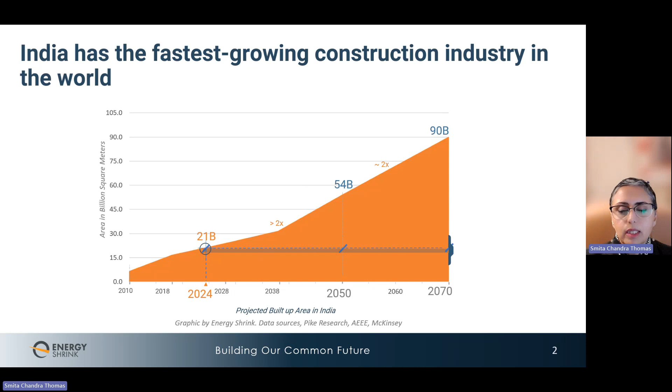I will take a couple of minutes to explain where I'm coming from. As mentioned in the introduction, my name is Smita Chandra Thomas. You know how some people are recovering alcoholics? I am a recovering architect. In fact, Anveshan is being held in the city where I went to college. I did my architecture from the College of Engineering, Trivandrum, and Trivandrum is also the home of my in-laws. That's where the Thomas in my name comes from. And I still visit Trivandrum with my family.

I really wish I could have joined you all in person. I hope you're enjoying some good weather there at this time of the year. So much cooler than northern India at this time of the year.

But Kerala gets really hot in December. You know, Kerala was not so hot and humid in the 1980s when we went to college. And the dry heat of Delhi was not so hot and so dry when I went to high school there for 2 years. And then in Himachal, where I grew up until my teenage years, we never needed more than a fan in the summer in my hometown of Sundarnagar, which is on the way to Kullu Manali in Mandi district.

There was only one way to get to our town in the 70s and 80s. We had to drive on a single lane road for 5 hours through the hills. There was the beautiful smell of pine trees as we entered the hills. And now we have a 4 lane highway lined with construction all the way from Chandigarh to Kullu Manali. No pine trees. You can cover the entire distance all the way to Kullu in about 4 hours. My hometown of Sundarnagar has become unbearable in the summer without an air conditioner.

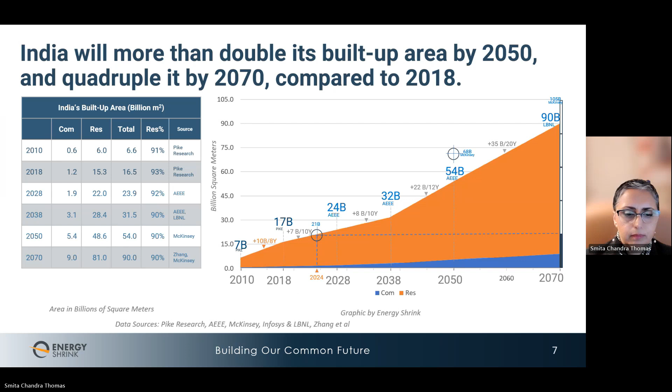Why are all these studies projecting this enormous growth? There is a trifecta of forces driving India's construction growth. One, a growing economy. Two, a growing population. And three, increasing percentages of that growing population migrating from rural to urban areas, attracted by the economic opportunities. Let's look briefly at each.

What is happening with India's economy? To look forward effectively, we must look back. Look at the economic trajectory India is on. The World Bank data on India's GDP going back to 1960 shows that India's economy grew about 10 times in the 34 years between 1960 and 1994, and another 10 times in the 28 years between 1994 and 2022. That is, it has been growing roughly 10 times every 30 years or 3 decades.

Since the early 1980s, India's annual GDP growth rate, that is your gross domestic product growth rate, has hovered between 4 to 8% for the most part. Based on these historic averages, India's economy is set to double every 10 to 12 years, which translates to roughly another 10 times growth again in the next 30 years. So if the GDP was 3 trillion US dollars in 2020, we can expect a GDP of about 30 trillion US dollars around 2050, 30 years. This increasing wealth is creating a rapidly growing middle class.

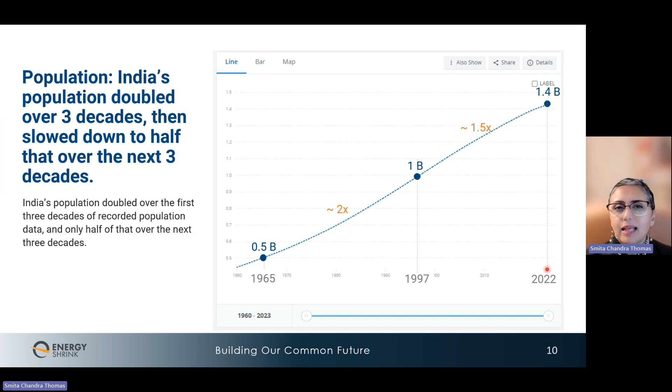Finally, let's look at urban population. Again, World Bank data shows that 80 million people lived in cities in India in 1960. In 1970, just 10 years later, when the first national building codes were published, and please note that I'm highlighting some of these years because they're related to construction. So in 1970, India's urban population was 110 million. From 80, we went to 110.

By 1994, it was 250 million people, about a quarter of the total population living in cities. In 2007, when the first national building energy codes were published, the urban population was now more than 350 million. That happens to be the total population of the US. In fact, it's more than the total population of the US. And more recently, in 2022, it was more than 500 million.

In the table, you can see the percentages, and they show the steady trend of population moving towards cities. So here's the urban population, here's the total population, and here's the percentage. Again, data is king. In 2022, nearly 1/3 of the population of India was living in cities. By 2050, more than half the population in India is expected to be urban. What was 80 million in 1960 is going to be more than 10 times at 814 million by 2050, over just 90 years. So the largest opportunity is in the housing sector in the cities in India.

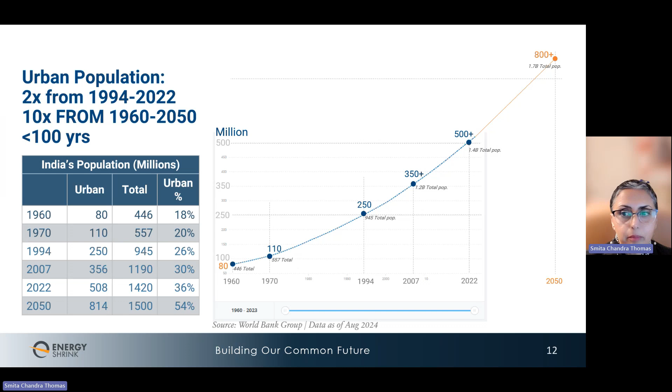Now, the global population is projected to be 9.8 billion. Let's say 10 billion in 2050. Okay, out of which India's population may be around 1.5 billion. The UN estimates that India's population will likely peak at 1.7 billion in the 2060s, but it could also peak at 1.5 billion by the 2040s in a different scenario. Either way, India will be the most populous country in the world by far in 2050 and through 2070.

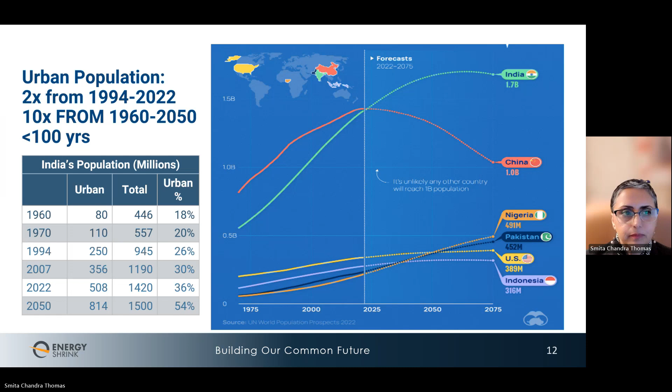One in every six people in the world will live in India by 2050. That is our 1.5 billion people. And of these 1.5 billion people, more than 50% will live in an Indian city. That's our 814 million. That means a twelfth of the world's population will live in a city in India. About one in every six people in the world will be an Indian, and half of those, one in every 12 in the world, will be living in an Indian city in 2050.

Keep in mind that these numbers are all projections based on what we know from history. Very smart people spend their entire lives analyzing these trends. But all these numbers might go out the window if there's a new pandemic, or a world war could change the economic and population trajectory. Political or social instability can easily tank the economy, changing the construction trend, or all of human civilization might fall to artificial intelligence. As they say, the only thing certain about the future is uncertainty. But still, we must study these likely scenarios and prepare to control what we can.

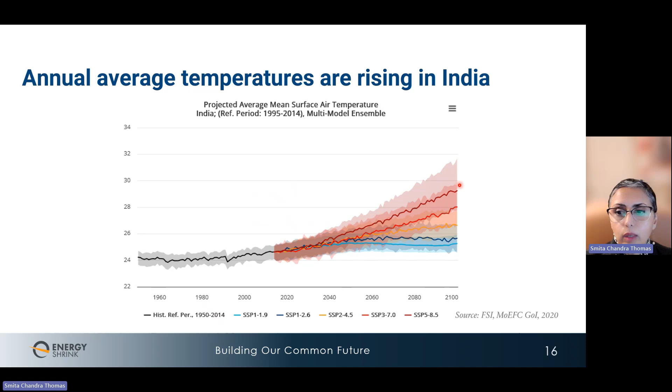So, coming to the second part of my presentation, if things stay more or less on the current track, what can we expect as climate impacts? Annual average temperatures are rising in India. I'm sure you can all feel it. The chart shows projections of temperature changes in India between 1960 and 2100 in a few different scenarios. In the best case scenario, the average annual temperatures will increase by about 1 degree Celsius in 2040. In the worst case scenario, average temperatures are projected to go up by 6 degrees Celsius. Given the uncertainty, I would say let's get prepared for the worst and let's see what we can do to help keep those lines down.

Only 5% of the households in India currently have an AC. By about 2040, about half the households might have one. As the economy improves, the temperatures rise, and we build more urban areas, making it even hotter, we will see more ACs.

Now, the heat rejected from these ACs will in turn make the outside air even hotter. You know how air conditioners work. They cool the inside air and they reject heat outside. So your outside air will get even hotter, which will then require you to use your AC even more. So it's a vicious cycle.

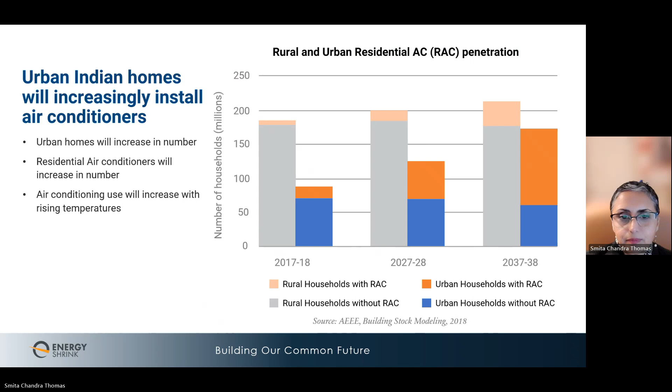Because of this combination of hot weather, population, and economy, energy consumption in buildings in India is expected to increase faster than in any other global regions. After a small setback during the pandemic, the rate has picked up again. India ranks amongst the leading electricity producing countries worldwide, just below China and the United States.

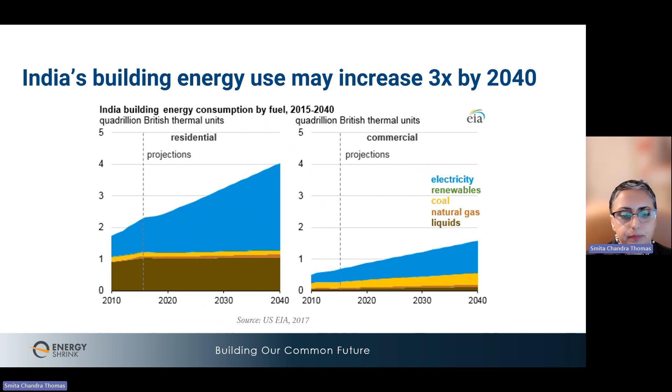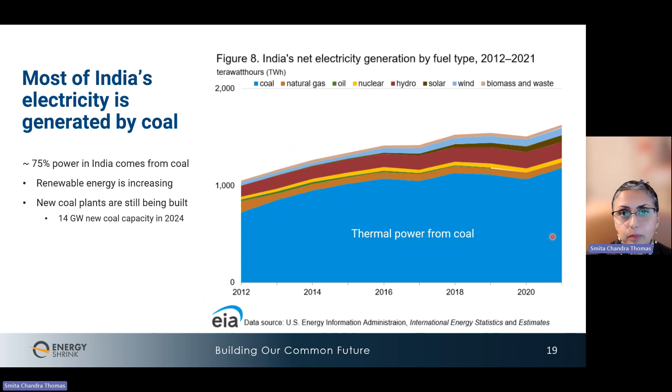Look at this important statistic. In 2021, building emissions accounted for around a fifth of India's total carbon emissions and 33%, a third of the total energy use, went to buildings. So the carbon intensity of India's electricity grid is currently about 0.7 kg of carbon dioxide per kilowatt hour. That is nearly twice that of other G20 countries because of our fuel mix. That means every 3 kilowatt hours of electricity used in India produces about 2 kilograms of carbon emissions.

An average air conditioner, let's say you have a 1500-watt air conditioner, it will use about 1.5 kilowatt hours in 1 hour and about 500 kilowatt hours in 1 month. So in 3 months of summer, it would use about 1500 kilowatt hours. 1500 kilowatt hours used for one AC in one summer will produce about 1000 kilograms of carbon emissions. That's 1 ton of carbon dioxide from one AC in one season.

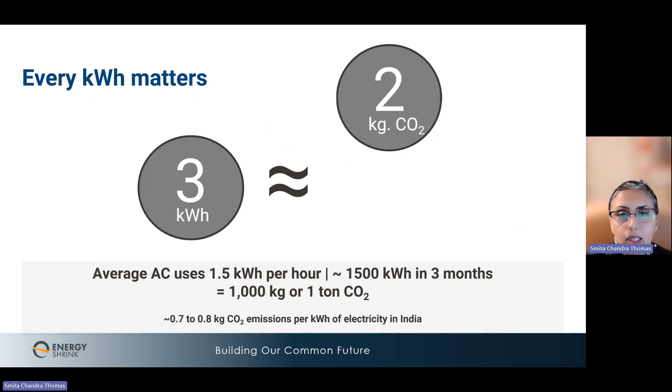And you know, once carbon is produced, it goes into the air and it stays there for hundreds of years. Carbon dioxide has a life of hundreds of years. So one AC is producing 1 ton of carbon. Now multiply that by 100 million air conditioners in urban India and imagine what that will do.

But you know what? The high use of carbon-heavy electricity is only part of the problem. The refrigerants used in ACs are also a huge source of global warming and climate change.

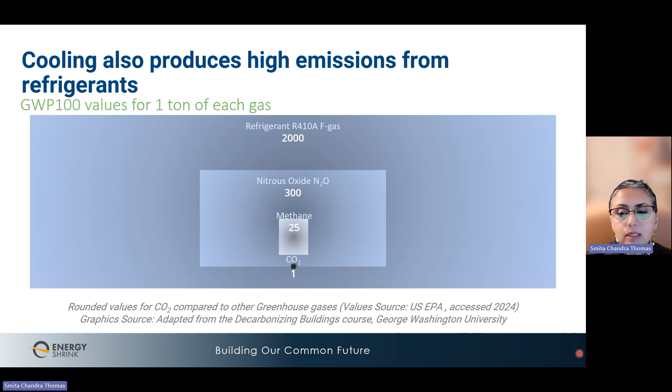When this refrigerant gas eventually leaks, or if it is not disposed of properly, it escapes into the atmosphere, causing 2,000 units of global warming. Now imagine the impact of that for 100 million air conditioners. This is actually what I've done in this figure, calculated that impact. These are some calculations I did back in 2017 for a paper I was writing on coolants for my clients at the World Bank.

The orange parts here are direct emissions from refrigerants. The blue parts are the indirect emissions from the electricity used for air conditioning, because the emissions are not at the building, they're at the power plant, so they're called indirect. As you can see, in a business as usual scenario, which we call BAU, the total emissions from air conditioning for India alone by 2030 could be almost as much as the rest of the global emissions we had from air conditioners in 2010.

These AC emission numbers are approaching 5% of the current total global emissions. By 2050, the emissions from air conditioning in India could be more than double the global emissions that we had from AC in 2010. That's about 5% of the total global emissions. You see, in 2013, we had very few air conditioners. And in 2050, if we keep doing what we're doing today, this is how much the impact would be.

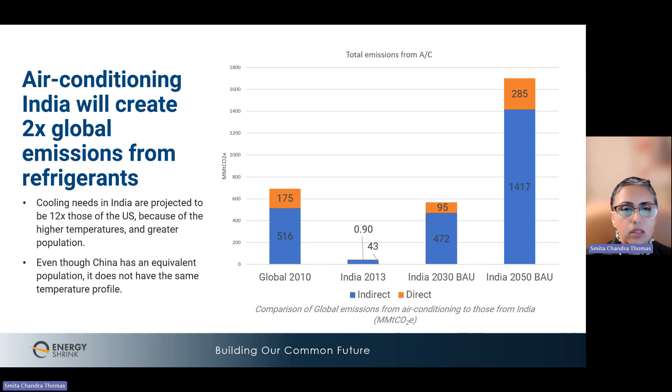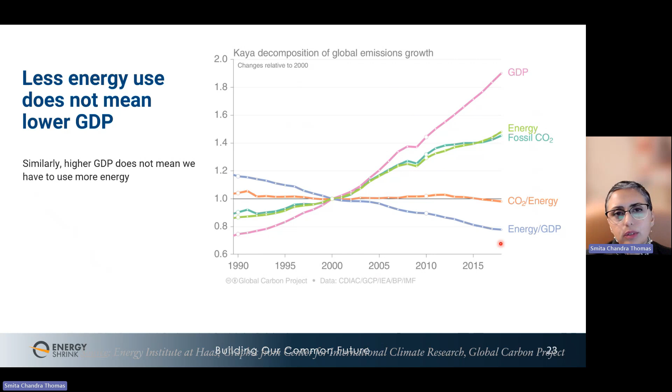India is rapidly getting richer, but an increase in GDP does not have to mean an increase in air conditioning and energy use. High energy use is not a badge of honor. In fact, as we can see in this figure, most advanced economies have decoupled their energy use and their GDP. This is showing data from advanced countries. Their GDP is on the rise, but their energy use per unit of GDP is getting lower and lower from 1990 to 2015. The lowest line here is the energy use per unit of GDP. Using resources more efficiently is in any country's national interest.

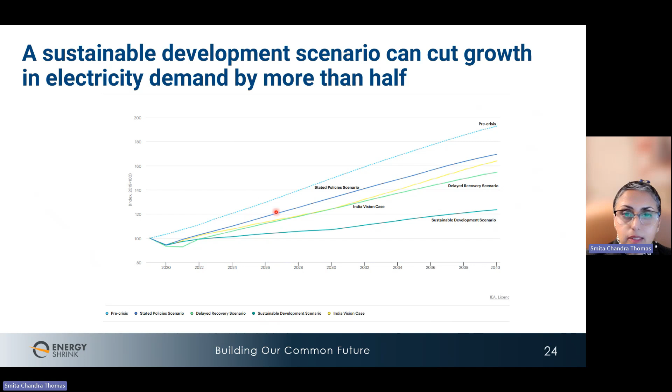In a country like India that is growing so rapidly, the impact of construction and climate is also a key consideration. So we talked about the use of energy in buildings, we talked about the use of refrigerants in buildings, but also there is the emissions from construction.

Right up front in a building life cycle, there are large amounts of emissions associated with building materials. Cement, steel, aluminum, and glass are the largest contributors to emissions from building materials globally. This is true globally. So a responsible architect can make a huge impact in this area by thinking about alternate materials and alternate ways to save materials.

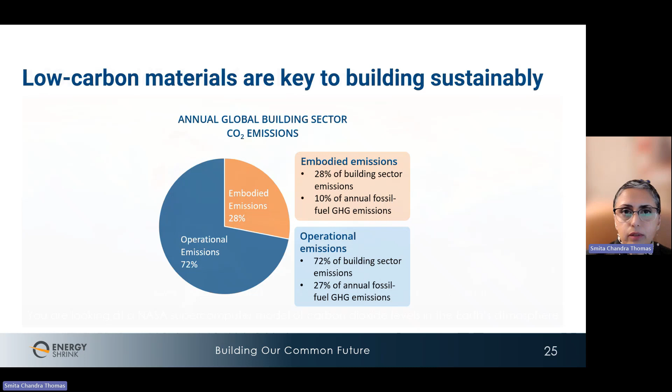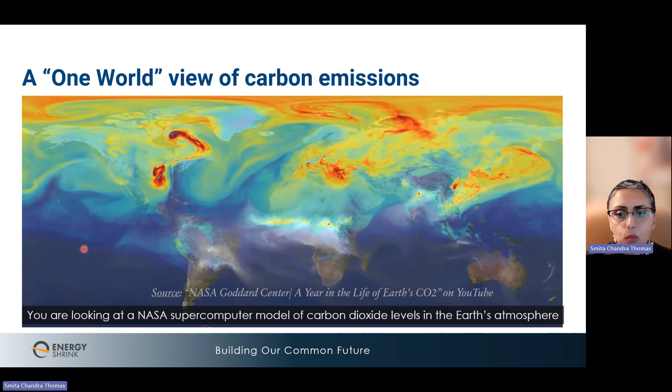So, coming to part 3 of the presentation, how can architects harness this large opportunity? By designing in such a way that provides financial stability, environmental stability, and good health and thermal comfort for their clients. I will briefly share 10 guideposts here.

Number 1, own your impact. First of all, architects must understand and own the tremendous amount of impact they can have. As the famous environmentalist Jane Goodall has said, what you do makes a difference. And you have to decide what type of difference you want to make.

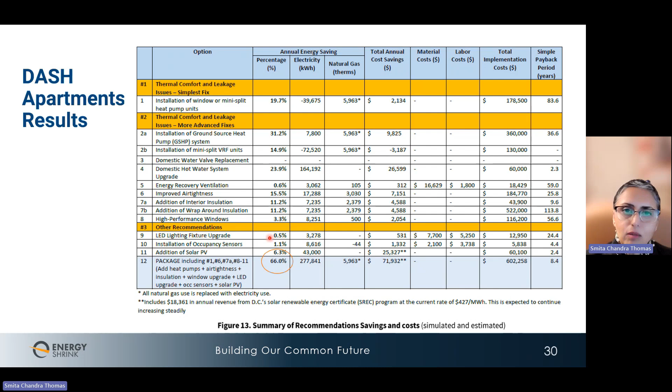And when we combined heat pumps instead of conventional air conditioners with the envelope and other measures, we got a total of 66% savings. That is, we could bring down the energy use by 2/3.

It's an old building. Additional insulation did not yield any savings. So this is also why energy modeling is important. It tells you when something is not effective and you shouldn't waste your money on it. So roof insulation yielded about 5% savings. It's a low building. If you have a very tall building, roof insulation is not going to make much difference because a very small area is covered by it. So combining all these again got us to 30% savings.

Adding window film only got about 3% improvement, but upgrading the old metal windows, which also upgrades the frame, got us 17% improvement. So when combined, the air tightness, roof and wall insulation, and window upgrades got us 46% in savings. We are cutting our energy use by almost half.

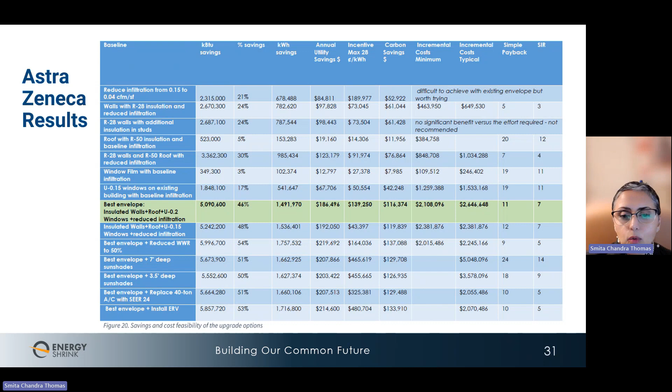This is also what I love about energy modeling. Even if you've been doing it for 20 years, a model can sometimes beat your intuition. So you'll see two depths of shades drawn here. This is a solar path diagram, and it indicated an ideal depth of 7-foot shades. But when we looked at the price of those shades, we found that 3.5-foot shades, that's about 1 meter deep shades, were much more economical. So we modeled those. We looked at the comparison and we found that it only made a difference of 1%. So that's what we recommended.

So, by the way, I do want to give a shout out to my partner in crime here, Maz Dikshit of Seed Consulting. She's based in Gujarat, and I work very closely with her on these modeling projects that I've shared.

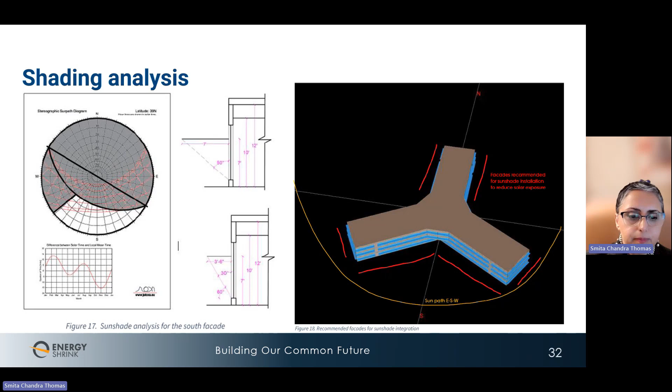Okay, so the next, number 2, get started. What do I mean by that? We don't need the perfect team or the perfect solution. Like we saw earlier, every kilowatt hour saved makes a difference to our planet. So if you can start with just one thing that you can improve in a project, do that. Make it standard practice in your projects. You can keep exploring and adding more ideas in the next project. I want to stress that we shouldn't lose any opportunity that we have, because once built, the performance of our buildings gets locked in for the life of the building for the next 50 to 100 years. So we must act whenever we get a chance to make things better.

All right. So the US happens to be the most advanced market for energy efficiency initiatives. Now, before 1973, energy consumption was booming in the US. Nobody cared because electricity was cheap. But the oil crisis in the 70s changed attitudes. People wanted to be energy independent from oil nations. It took another 20 years to create green building rating systems. And now, finally, another 30 years later, we are looking at mass scale efficiency. Before that, it was just individual green buildings here and there. So it takes time to get there. The US took 50 years, but we are in a climate crisis. So hopefully, with access to all the knowledge in the world, India can leapfrog many of these stages and get right to it.

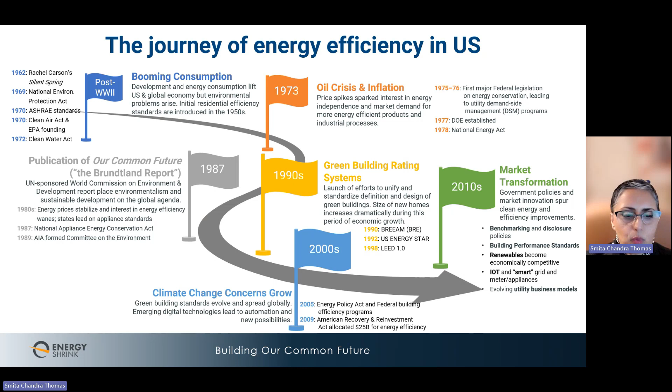I know that India is still working on implementing building codes, building energy codes. But I'd like you to keep in mind that building energy codes set the minimum acceptable standard of performance. Meeting code is like getting a passing mark. It's like getting a D. Indians like to get A's. Don't settle for a D. Get to learn your energy codes and then do much, much better than the minimum. Get an A.

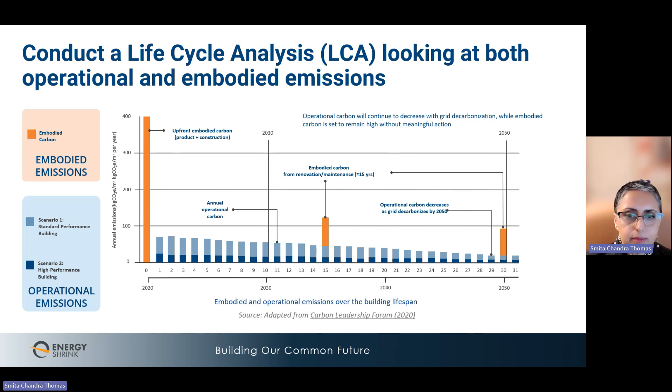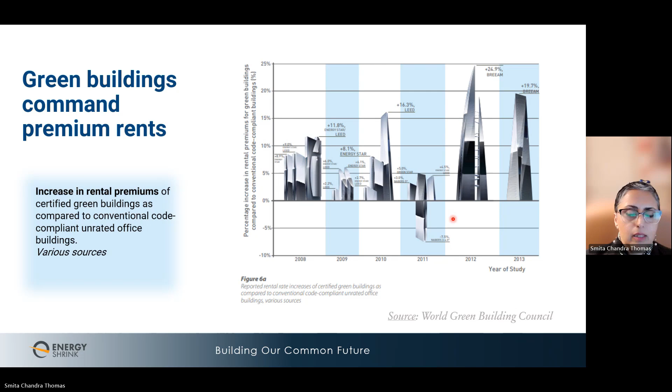All right, number 3, know the value of sustainability. Sustainability is not just a nice to have feature for greenies. It has real financial impacts for owners, especially if we can save energy in a country like India, where energy is quite expensive. So one example of financial impact is that green buildings command premium rents. Green buildings also sell faster than average.

All right, next, number 4, consider the climate. Now, this is at the heart of everything that an architect can do. Consider the climate. From a building physics perspective, the fundamentals of how a building behaves don't change from one building site to another. When we model these in any software program, the same principles of physics apply in any simulation software. Some applications may be better at calculating heat transfer by the minute, and other software may be better for natural ventilation, but essentially the same fundamental principles of physics are being modeled. The heat transfer, natural ventilation, etc.

So in modeling, we use the term GIGO, garbage in, garbage out. So yeah, you can have bad models, which are totally useless if they're not done well. But for a reasonably good model, a typical process looks like this. An architect provides building design information, and then this is combined with climate data in a simulation calculator, churned through the simulation engine using a bunch of physics equations to produce outputs. The outputs may be energy or water use, daylighting patterns, ventilation patterns.

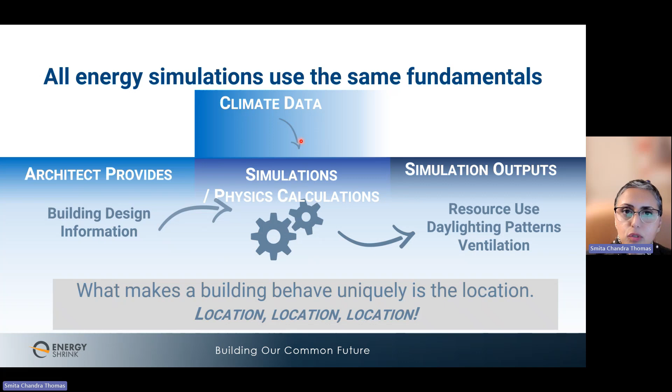So get to know your climate zones, learn their temperature, rainfall patterns, wind directions, angles of the sun in winter and summer. Take the time to understand what design elements work best in those climates. And I can guarantee you one thing, in no climate zone in India do glass towers make sense. In fact, glass towers don't make sense in most climate zones in the world. Maybe in Hawaii, if you have all the windows open. But that is because glass buildings act like greenhouses, and we are not plants. So that's the last thing we need in a hot climate.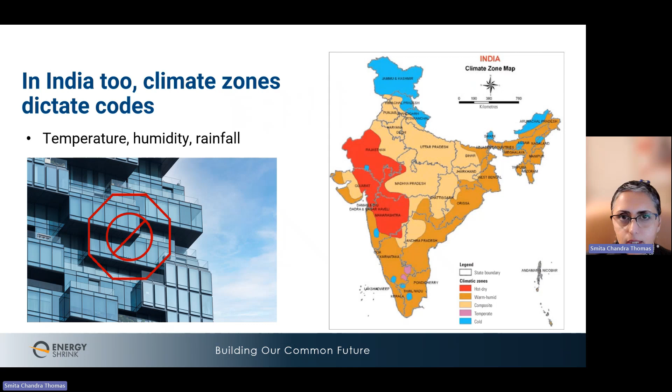I invite you to search up my article in a magazine called Triple Pundit. It's online. The article is called Shattering Glass Myths, to understand why I'm saying this better. I've written more than one article on this topic, and it's one of my pet peeves. So before I start getting upset, I'll move on to the next point. But please do look it up. Shattering Glass Myths.

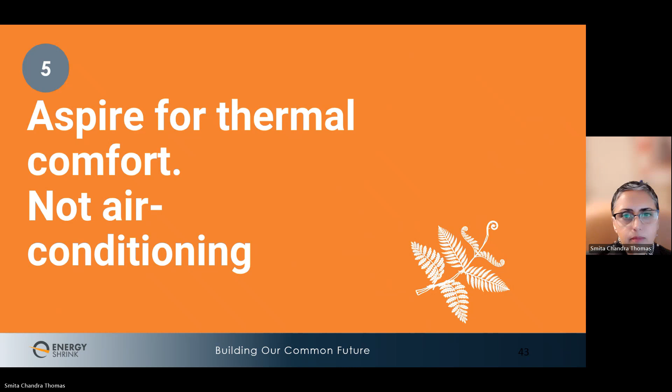All right, number 5. Aspire for thermal comfort, not air conditioning. We talked about air conditioning and energy. It's worth noting that our goal is to achieve thermal comfort. Thermal comfort is achieved simply by being mindful of the natural elements and sheltering ourselves from the extremes. Most of our energy use for cooling and heating goes into maintaining the temperature and humidity of that ball of air that we are living in.

This is why airtight envelopes make sense in a very hot and dry or a very cold climate. They don't make sense in Kerala, where natural ventilation is the key to comfort for many months in the year.

But if it's too hot, another way to keep comfortable in Kerala is to seal your house really well and then use a dehumidifier to reduce the humidity with controlled mechanical ventilation for fresh air. You do need fresh air if you seal a building very well. So anytime we introduce a mechanical system like an air conditioner, we designers want to detail our seals and our air tightness as best as possible.

Did you know that air can pass through cement, brick, and gypsum board? If you want to make a building airtight, you have to use special layers on the wall and roof and floor materials with something called low permeability. It's measured in perms, how much it allows the air to pass through. So these are typically special paints and membranes like paper and plastic barriers called air barriers.

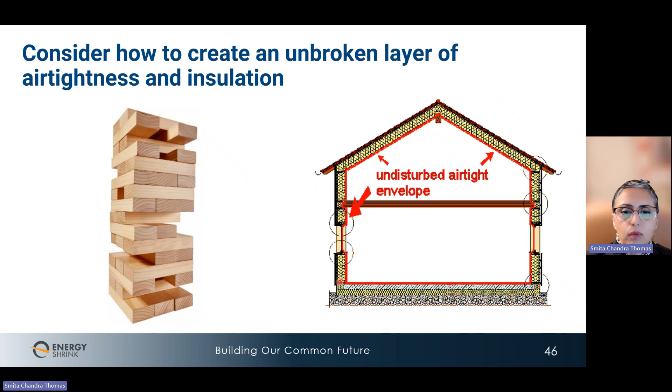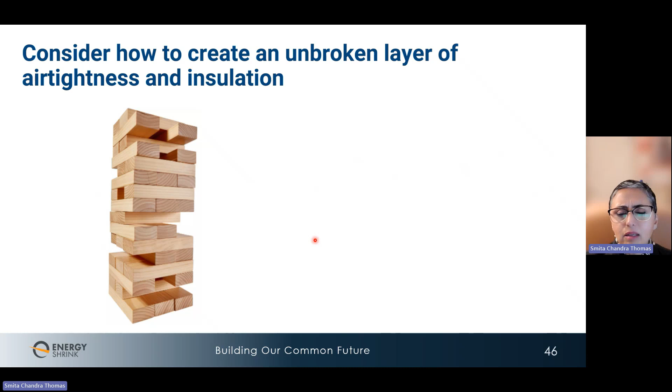Designing iconic Jenga block shapes might make us into famous architects, but they can be really uncomfortable for people living inside these spaces. And they can be hard to insulate and make sure that they're waterproof. So let me just say again, no, don't do this.

All right, number 7, focus on the fundamentals. Reviewing the fundamental natural climate elements in the early design stage is the key to good design. The key climate elements are the sun, wind, and humidity. They impact temperature, daylighting, ventilation, infiltration, humidity, and moisture damage in the building.

Some strategies that we can use to manage these impacts include building orientation, window wall ratio, thermal mass, insulation, thermal bridging, rain screens. So many things an architect can do. And an architect must look at these elements. A mechanical electrical engineer is not even going to consider them.

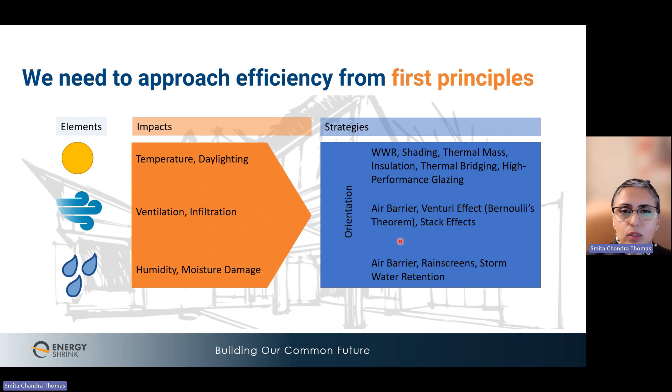All right, number 8, build it to last. To reduce emissions from materials in the future, we must build good quality buildings that can hold up to harsh elements like floods and strong winds so that we don't have to keep rebuilding. This ability of a building to withstand stress, whether it is chronic stress like regular heavy rains or sudden shocks like a flood, is called its resilience.

Okay, number 9. Truly sustainable buildings are those that will sustain themselves over the years, and that will also help sustain human life during their lifetime. To achieve such measurable energy, carbon, and resilience goals, architects must engage with the broader team and follow what we call an integrated design process.

Big slide here. I'll keep it quick. The process of integrated design is a disruptive approach to design. In the traditional approach, which is on the first half of the slide, energy is not considered in the early design stage, which is in the orange color. Energy modeling is done by mechanical electrical engineers in the DD and CD phase, the design development, construction documents stage. And at the bid stage, many times efficiency options get value engineered out of the project.

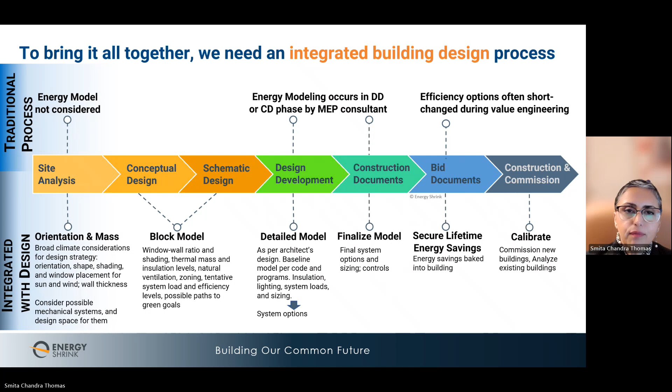But this is not the traditional business model. The fees of an architect typically don't include budget for energy modeling. So how can we get there? We need a new business model. We need to educate our client about the value of doing this upfront to save them money later. But bottom line is we have to engage early in the design process in these decisions, and so the combined hard and soft costs of a project can be kept under control. In fact, if you do it right, you can even save the client money at the end of the project.

And finally, the last point, learn from history. Isn't this the point of Anveshan, this conference? To learn from history to inform the future. We can actually save our clients money by looking at how we did things before we decided to build glass box buildings in Bangalore and then throw a whole bunch of energy and air conditioning at them to solve the problem. Machiavelli famously said that whoever wishes to foresee the future must consult the past. So one final historical fact I would like you to consider is that central air conditioning is less than 100 years old. Meanwhile, passive design principles have been around for centuries. People in Rajasthan, Assam, Himachal, Kerala all had unique building styles to suit their climates.

Well, we cannot go back to those times. We no longer have those materials, that labor, those skills anymore. But we can learn the underlying fundamental ideas. For example, high ceilings with openings and lightweight walls are good in Kerala climate. Laurie Baker had the right idea about this. But thick insulated walls are good in Himachal and Delhi. So if we can consider these elements, our client could save money on installing many extra tons of air conditioning and then also on those steep monthly bills, which will keep getting higher every year with global warming because you'll have to use your AC more.

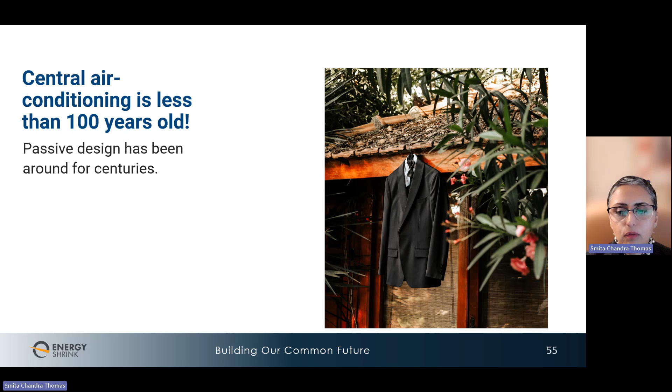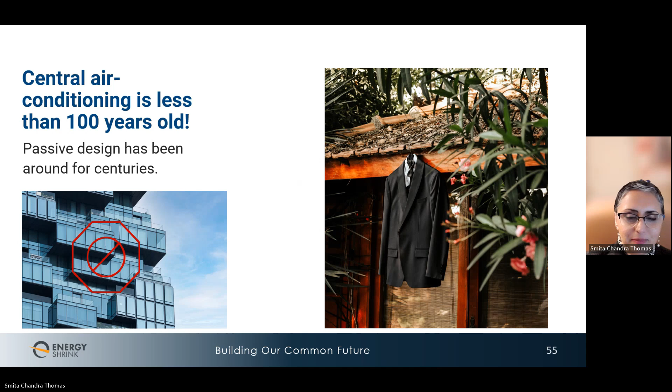So how do we achieve these design ideas with today's materials and labor and machinery within the client's budget? That is the challenge the architects need to solve today. There are several beautiful examples you can see from Washington in the west to Austria to the Philippines in the east. And please, before I go, don't build glass boxes in India. The future of our habitat, our earth, our home is in our hands.